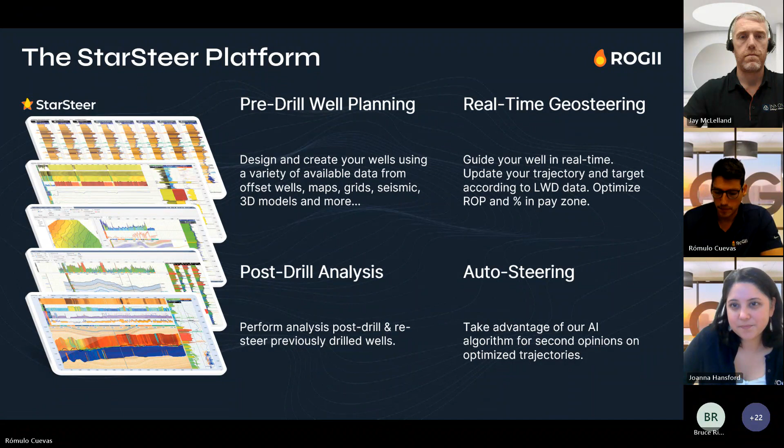Okay. So let's move on to Jay. Jay, would you want to talk about Innova?

Perfect, thank you. So Innova was founded in 2011, and we're a technology company that specializes in industry-leading software solutions which are tailored specifically to the energy sector. Our software focuses on 3 core areas. We have directional drilling, well planning, and drilling engineering. I'll talk a little bit more about them on the next slide.

We have a global market presence. I would say North America currently represents our primary market, where we're the software of choice for almost all of the directional service companies. Customers also include the operators and well engineering companies.

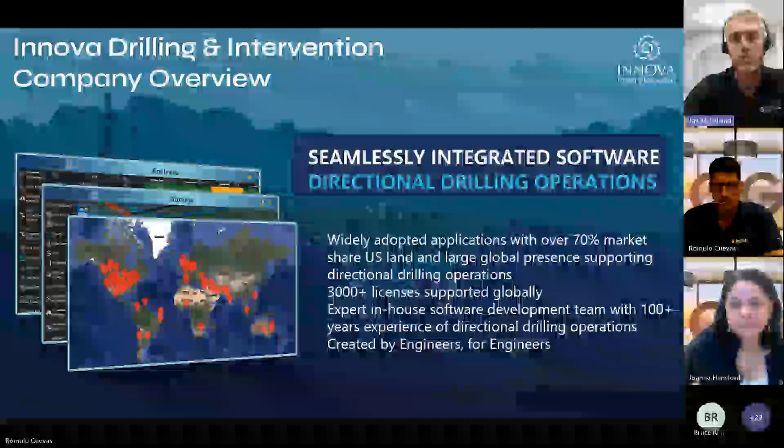I would say that probably one of the things that really sets Innova apart is our team. So most of us have direct experience working in the energy sector as well planners, directional drillers, MWD engineers, and drilling engineers. And this hands-on experience really gives us a deep understanding of our clients' challenges and enables us to develop software that truly meets their needs. If you could move on to the next slide, Romulo, please.

Thank you. So as I mentioned, the 3 core areas that we specialize in are directional drilling, well planning, and drilling engineering. And as such, users can utilize the software all the way from the initial design phase through the drilling phase and beyond to post-well analysis.

Now in the design phase, well planners and drilling engineers can plan the well trajectory, ensuring that they hit all the desired targets and avoid any offset wells by running anti-collision scans. They can then run torque and drag and hydraulics calculations to ensure the well can be drilled within the limitations of the rig and the available tools.

At the rig site, your directional driller can use the software to enter the surveys, ensure they're following the desired plan, while at the same time using our integrated daily reporting package to record all of the rig site operations. Now, all of which has been sent back to the client server database in real time, which gives full operational oversight to everybody involved in the project. And it allows for real-time optimization, utilizing things like our EDR data and engineering calculations.

At the end of the job, our analytics package then allows for a comparison of key performance indicators across multiple wells, giving invaluable insights across all the company operations. Now, this ensures that the lessons learned are identified and carried across to the next project. And all of this is achieved basically through a suite of desktop and web-based applications and accommodates single rig operations through to multiple global drilling operations and everything in between.

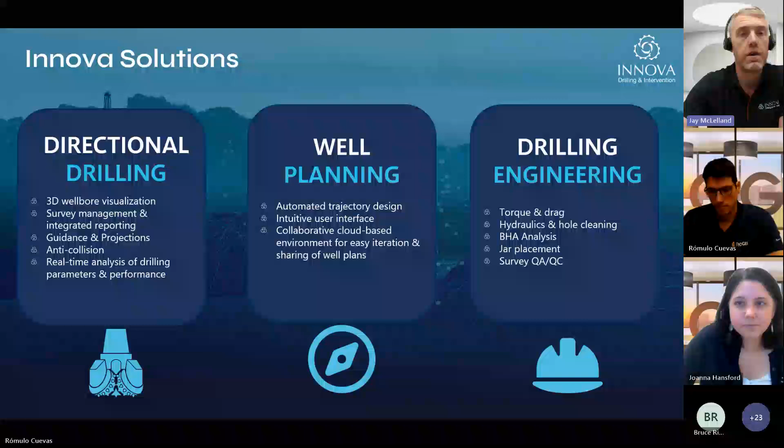Go to the last slide, please, Romulo. Thank you. So one of our primary goals is to offer solutions that enhance data flow and as much as possible, simplify complex manual processes. To achieve this and meet the industry's constantly evolving needs, we enhanced our software solutions with an API integration. So the API enables cross-platform communication and data transfer, and it provides our clients with a more streamlined and efficient workflow.

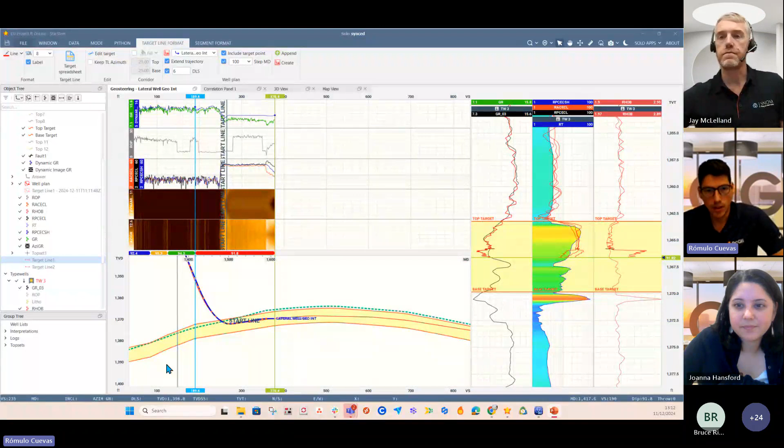Okay, so as a light demo, we have prepared a project. So this is the Geosteering interface. I believe the majority of you know it. So what we are going to do is send the projection of our target line from Geosteering to the other software, WellSeeker, where we will create a plan, and the plan generated in WellSeeker will pop up in Geosteering again.

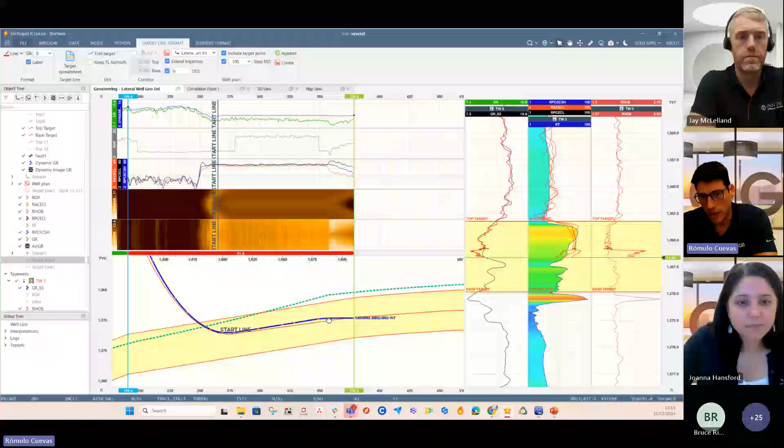So as you can see in this project, this blue line here is my actual horizontal well. This is inside of the reservoir, right? And I have a red line here, which is my well plan. Okay, so by now the drillers are following the well plan, and we have also image logs, density image log, resistivity logs, density logs, gamma ray logs.

So now I'm going to perform geosteering. So I go to mode, geosteering, and I can see, okay, I'm following with this stratigraphic technique. I'm following my stratigraphic position based on the correlation between my gamma ray, resistivity, and density logs.

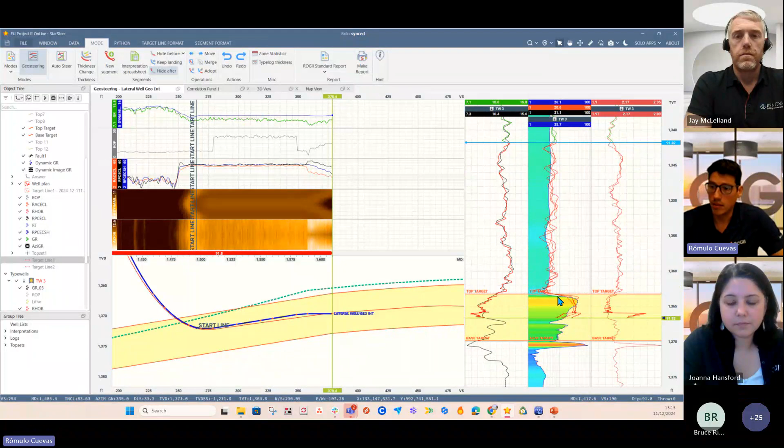And I can see in this area that the log is different. I have a low value in gamma ray. I have a high value in the density log, so I can split the log here and keep following this correlation. So I know, okay, perhaps we have crossed a fault here, matching my density peak here and my low gamma ray in this area.

And then I can visualize also my image log, and I can see that there is a sharp contrast here in my image log. So I'm going to bring this fault a little bit here to match with my image log too. So everything is matching here. My gamma ray and density are matching, and also my image log is suggesting this sharp contrast.

So now I know I am actually outside the reservoir, because we crossed a small fault around 4.4 throw, and I need to change the inclination. I need to change my projection, right? So I'm going to activate my target line, and I can place my target line inside of the reservoir based on this interpretation. And after that, we can start sending this information to WellSeeker.

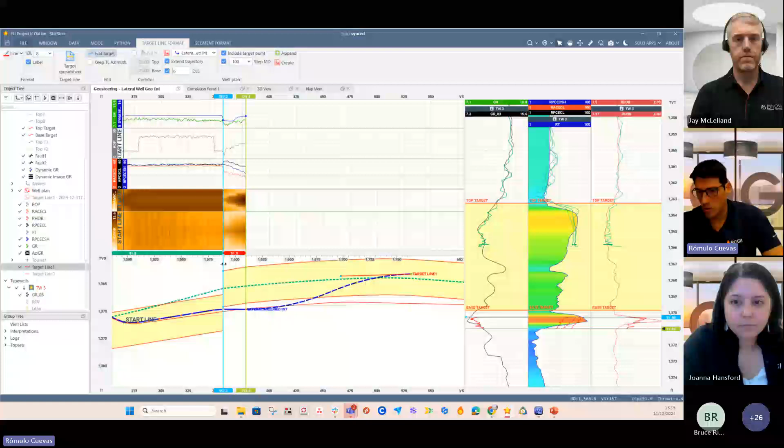So I'm going to open WellSeeker here, and my friend Jay will talk a little bit more about the interface here. Thanks, Romulo.

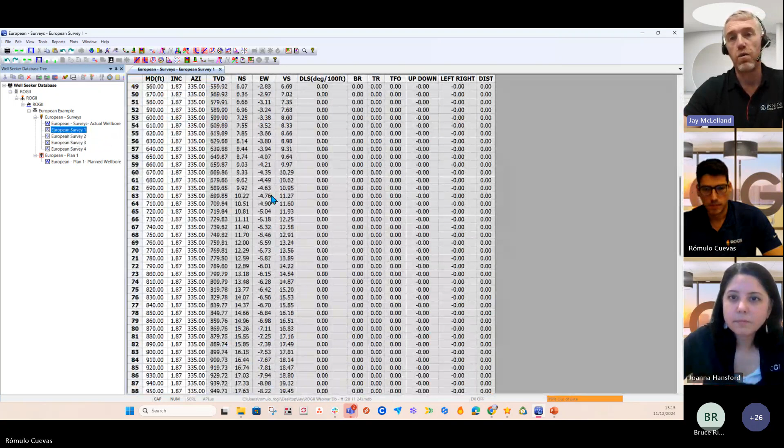So what we're seeing here is our desktop application, WellSeeker Pro, and this is what would be in the field. The directional drillers would be using this, and they'll have the principal well plan on here, and they'll be putting the surveys in as they go along. They will be doing the daily reporting and everything else within here. And there are tools that they will utilize as they're drilling along to help them stay as close to the target line as they possibly can.

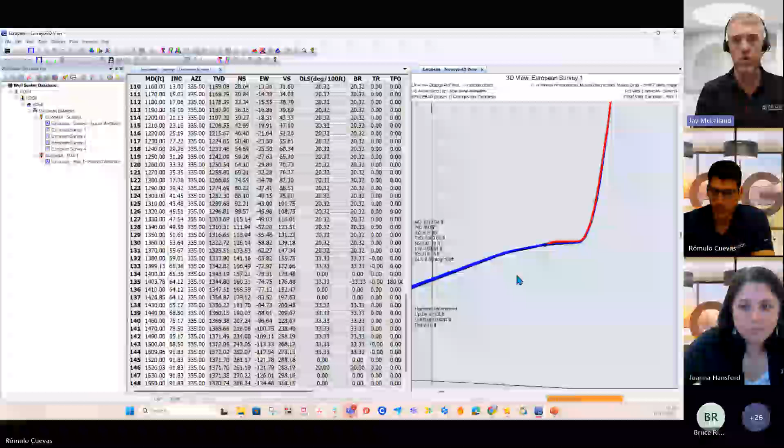Now, what Romulo is showing you here is a situation where the directional driller is drilling a well where we have a lateral. As they have landed out the curve and are now into the lateral, they are aware that there may be some level of geosteering depending on how things go and the data that comes back from your MWD tools.

Now, historically, you would have your geosteerer, your geologist, sitting with the StarSteer software, and the directional driller would be on the rig with WellSeeker, and there would be a new target line, which would then get emailed or sent digitally to the directional driller, who would then have to manually enter that into WellSeeker to create a new target line. And they would then have to send that back to the geologist so that they could put it into the system and make sure that we were all on the same page.

So what we've done now is we've simplified this process massively to cut down on the potential for human error and to cut down on the number of steps required, so that it speeds the whole process up. So now, when the directional driller gets into the lateral, all they would do is go to the tools menu, if you could, Romulo, and they would select the Solo Cloud target lines.

Now, in here, there are only two things that you really need to enter: a username and a password. The username and the password would be on the StarSteer side, so they would be provided with that information. And the way that the two systems communicate or understand the wells that you're looking at is based on the API number. So you have the API number in WellSeeker, you have the API number on the StarSteer side, and it will see that, understand, and give you the OK.

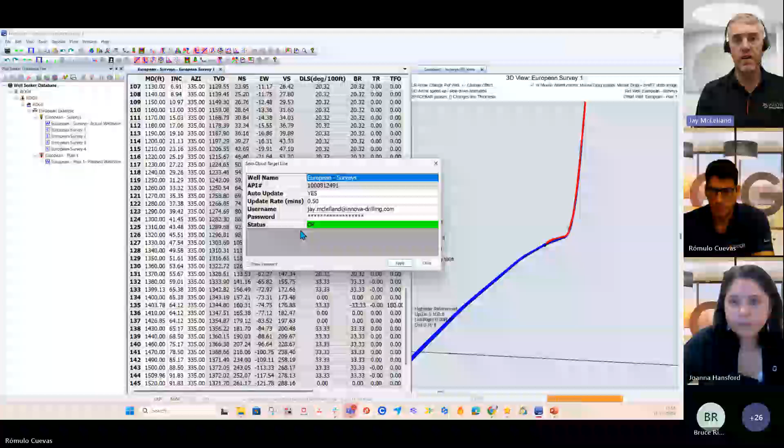And the system would then now be in a situation where every 30 seconds, we will check on the StarSteer side to see whether or not there is a starred target line. And that'll pop back over to Romulo to show you how that would look.

Yeah, so once we understand the structural tendency with the interpretation, and we have the projection now with the target line, I'm in the reservoir, I can just right click on my target line and set the star. The connection is already done in WellSeeker. So if I come back to WellSeeker here, I just need to wait a little bit, like 30 seconds. WellSeeker is reviewing which target line is starred in the project to send to create the new well plan, basically.

Yeah, so your directional driller at this point would be drilling along, following the line. They don't need to know anything, and literally it will just pop up as you've just seen on the computer. So this is the target line as it would normally be sent via an email. Yeah, so the target line with my projection in TVD, dips, everything. So what they need to do is just hit accept here, and the software automatically will create a new well plan, as you can see here in the 3D view.

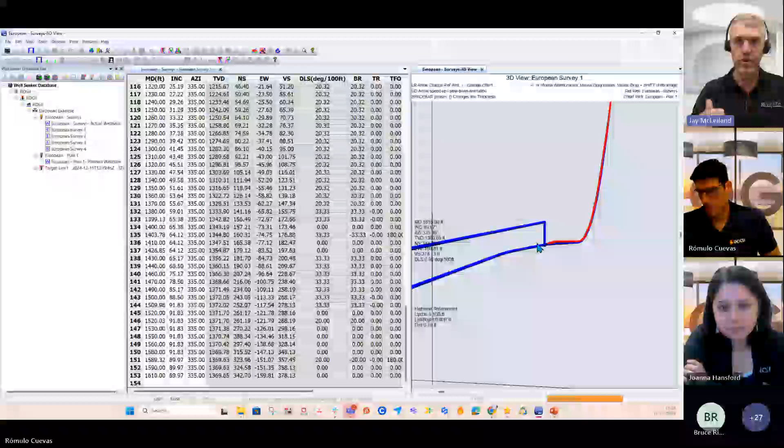Now, something to point out is you can see that it's a very sharp line from the original plan. It's designed like that. It's not designed to be a well planner's plan that would maybe use a 2-degree dogleg to build and hold and then drop. This is literally something that the directional driller now aims for. And the directional driller has the toolkit that they need within the software with our project ahead functionality, so they can project ahead and get back on that target line within the parameters that work for them in terms of what their tools are capable of and what they've been seeing.

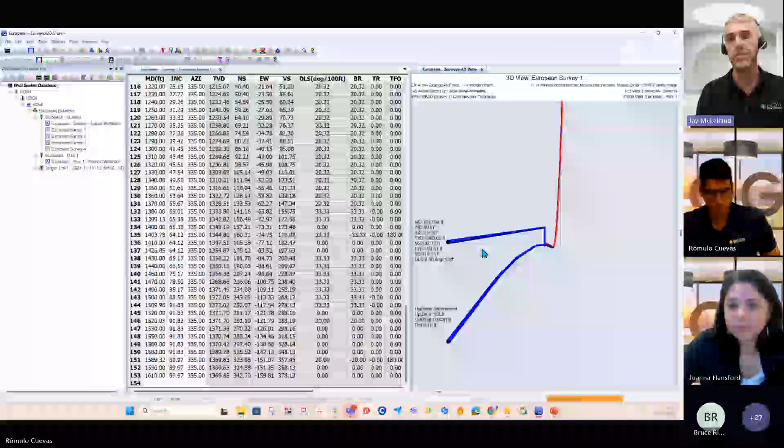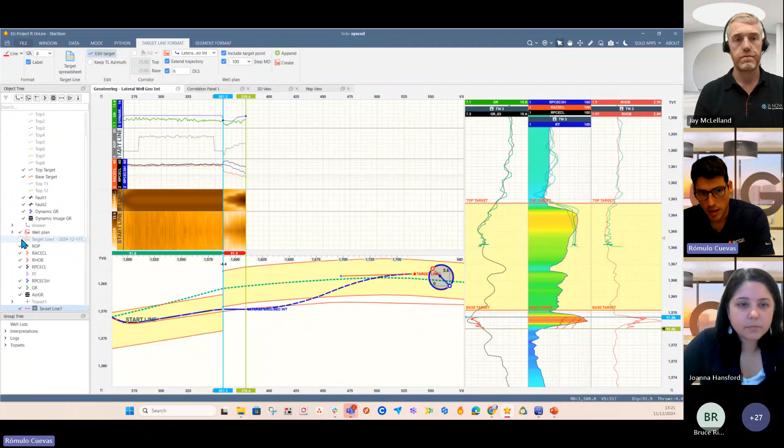So then once this has been done, as soon as that target line has been created, it now gets automatically pushed back to the StarSteer system. So basically it forms a closed loop system where it's a click of a button on the StarSteer side, click of a button on the WellSeeker side, and everybody's now kept up to date. Exactly. So in StarSteer here inside the well, I get automatically the new well plan. As you can see, this is my new well plan.

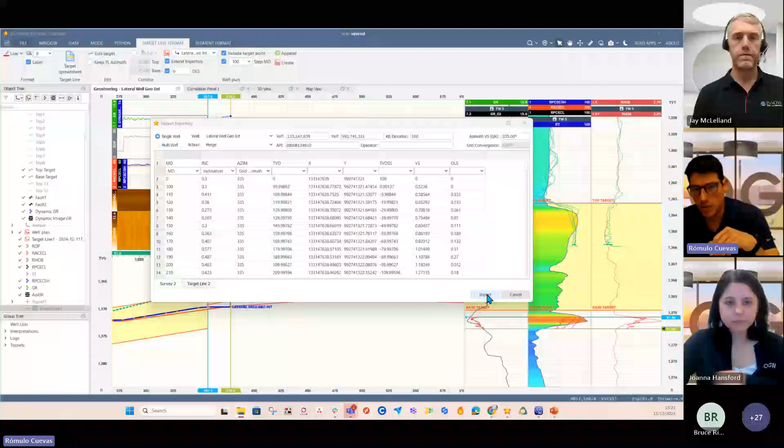So the drillers need to aim now to build inclination and aim these TVDs I'm projecting here. So I'm just going to send into StarSteer. I'm gonna bring more survey data. Okay, so imagine the directional drillers are drilling to aim this position here. I'm gonna send more log data, and more image log data. Here. Okay, so once I get more data, right?

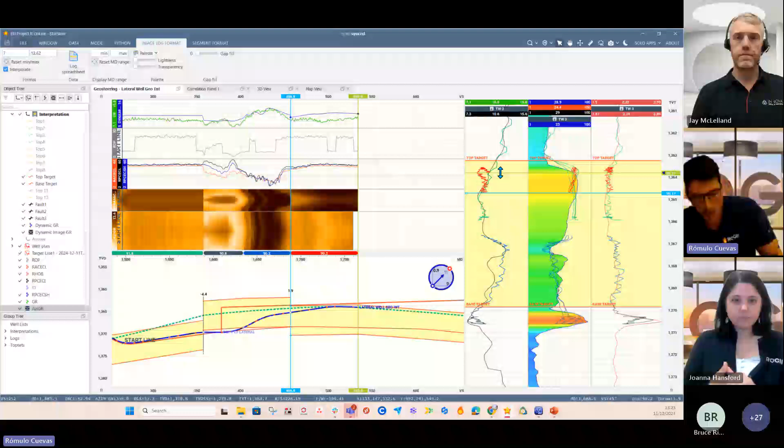So what we need to keep doing as geologists, as geosteerers, is keep making the interpretation. So I know, okay, I am coming back into my reservoir. The drillers actually build inclination, finding the TVD position I projected before, following this new well plan, right? And I can see I cross twice this high density peak. So I'm gonna keep following my stratigraphic correlation here. I can see that now I'm in this area of the reservoir, and at the end, actually, I am a little bit higher in the reservoir, as you can see, in this area.

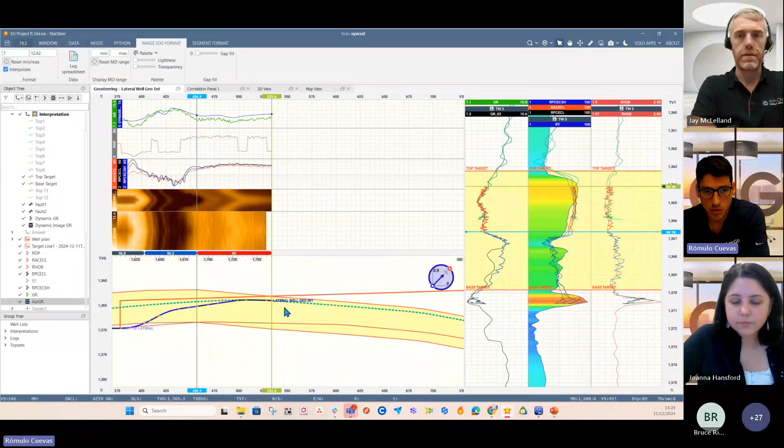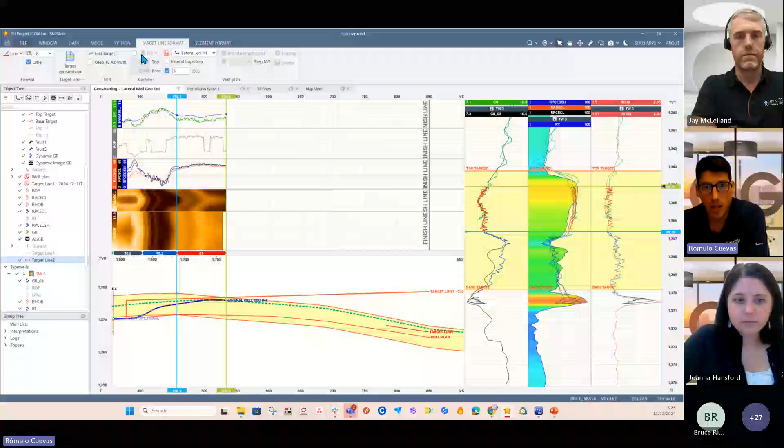So in my interpretation, based on my correlation, I can see the structural tendency is dipping down 1 degree. So it's not 90 anymore, it's not flat anymore. So we need to actually change the projection again. Otherwise, if we follow this plan we just created, we will exit the reservoir from the top again. So what I'm going to do now is reset the start here and activate another target line. In this case, this target line will help me to drop inclination. I'm going to start it. So now my projection is to drop inclination to hit this area where I believe I'll be, based on my interpretation. Okay, so I'm going back to WellSeeker now.

And I'm just going to clean this survey 1, the 3D view. I'm going to open the survey 2. So this is the current survey we have until the current MD. Yeah, so from that target change, we're now fast forwarding a couple of hundred feet. The directional driller has been following the new target line that they've had, and at this point now, we're going to get this new geosteering update.

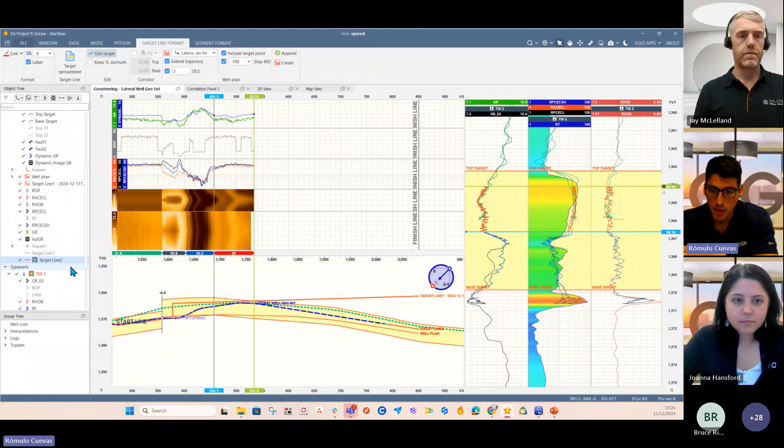Exactly. So now if I come back to StarSteer, what I need to do is again right click in my new target line based on my interpretation, and then set the start. And now I just wait here in Well Seeker, right? Every 30 seconds, Well Seeker is scanning for new target lines to keep updating this planned trajectory based on the interpretation of the geologist.

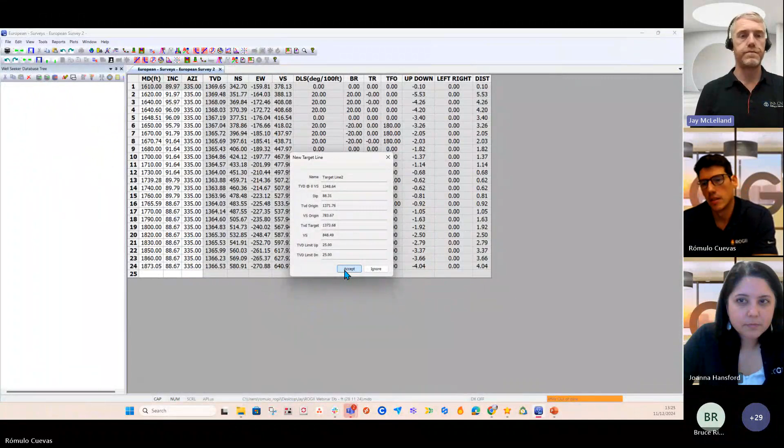Well placement. Yeah, and you can set up the time that it checks to a different frequency. 30 seconds is good, because then you don't miss anything, but if you wanted to make it longer, you could. So now I received my new target line 2, with the TVD and inclinations I project there. So I'm going to click here, accept. So now I have my target line number 2.

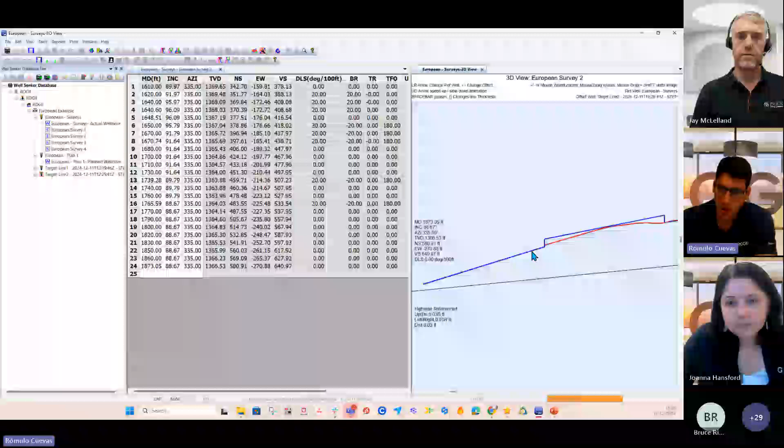So let me open here the 3D view. Bring here. So now I can see that I have my new well planned trajectory that is now going down, following my interpretation that the formation is dipping down, right? Yep. So then the directional driller from this point onwards has got the new target line that they're going to follow, and they will adjust their steering requirements based on that.

And then this is now eat, sleep, repeat. They'll continue to drill the lateral, and there could be 1, 10, 100 geosteering changes. It doesn't matter. Anytime a new one comes up, it will pop up on the screen. They hit accept, it creates a new line for them, pushes it back to geology, and move on until we TD the well. Yeah, exactly. Basically that's the loop.

So again, here, if I open StarSteer here, I can see my new well-planned trajectory, so the drillers can aim in this area, and we will still be geosteering, making the correlation using different geosteering techniques to understand the structural tendency of the reservoir in real time, and the transition, this projection is quite fast and easier.

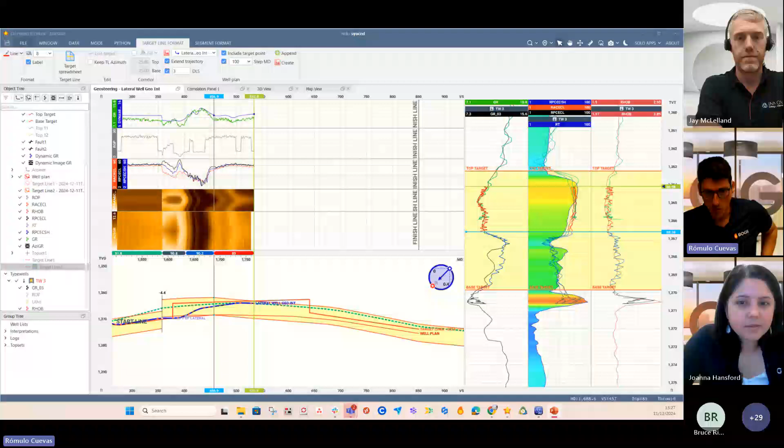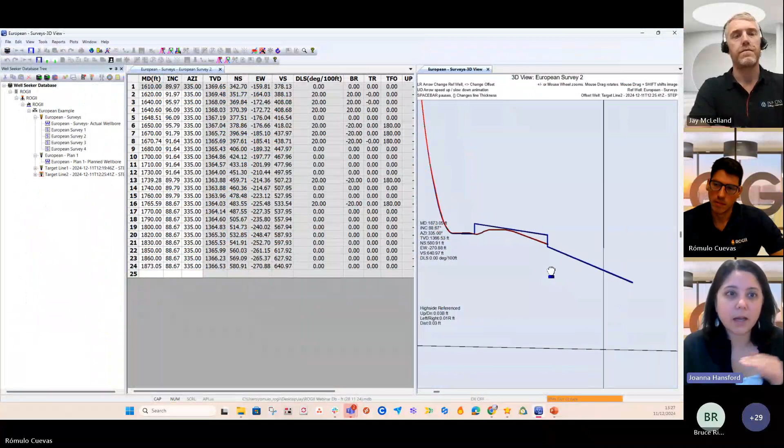Okay, so. Oh, just while we have the StarSteer screen open and Well Seeker Pro open, I just wanted to ask a question. We haven't had any questions yet in the chat, but I was wondering, when we're working with real-time operations, we often have quite a number of people involved in the drilling of a well. Not just the operations geologist doing the geosteering and the directional driller, but various other people who really want to follow along as we're drilling. So how can we set this up for these people? Is there a way for them also to collaborate in this process? I'll ask Jay first, and then maybe Romulo, you can also answer from the StarSteer side.

Yeah, great question, Joanna. So from the Innova side, if our client, the service provider, is utilizing a server database infrastructure, then we have a server database located in a cloud-based environment, and when the guys are working in the field, they will work on a local database. Within our system, we have data synchronization between the server and the local database. So anything that happens on the local machine, when the directional driller hits save, it automatically syncs up to the cloud. So anybody that has access to that cloud can see it through Well Seeker remotely, through our web portal or our mobile app.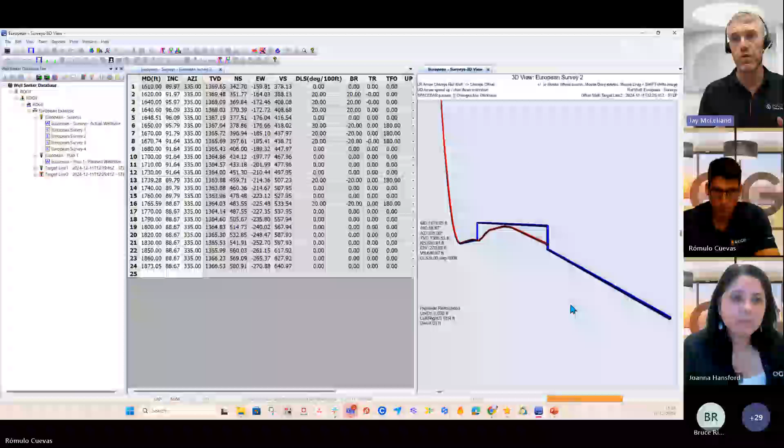If they've got access anywhere in the world with the right login credentials, they will be able to see what's happening. Now, when a new plan is created on the local machine, and it's a principal plan in the way that we do within the workflow of this integration, then that new plan is automatically pushed up to the server database, which gives everybody on the Well Seeker side full visualization of that.

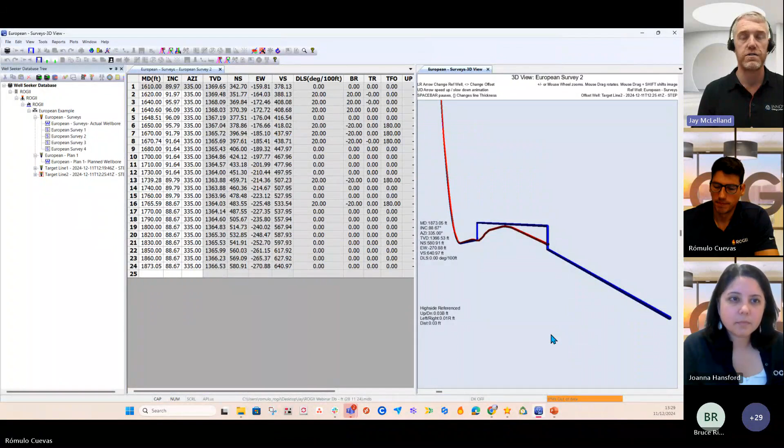So yeah, basically everybody's kept up to date of everything that's happening on the rig site. That's good to hear. Yeah, well, same happened here.

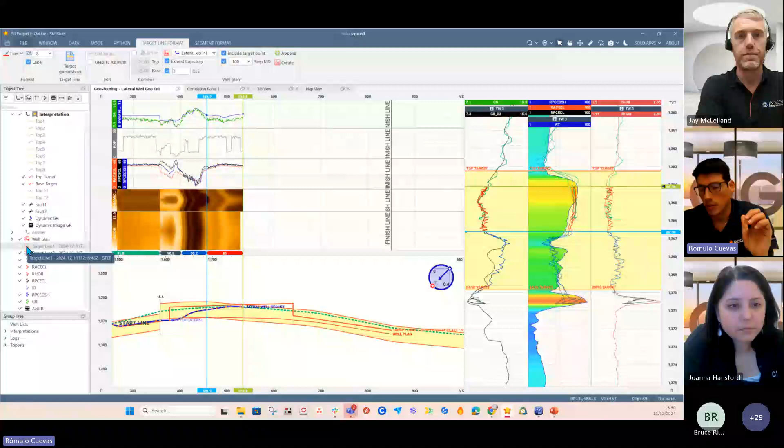Because we are working in the collaborative space of the cloud, in the Solo cloud, all the plans that arrive inside of this project will populate my global projects. If I'm working on this small virtual project with just one offset well, with my real-time horizontal well, all this data will be updated in my global project. So everybody who has access to this global project or the virtual project can see the new well plan available. The good thing is you can also see the time and date of the well plan, so everybody knows exactly which is the latest one, and there's no room for mistakes like when sending emails with plans and trajectories.

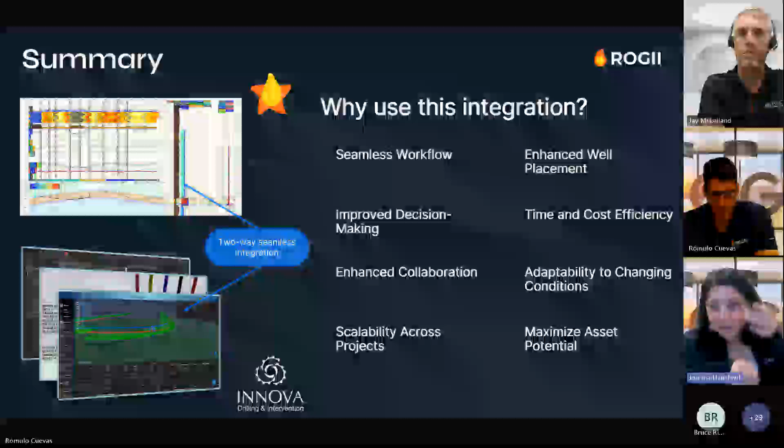Oh, thanks for answering my question. All right, well, I don't see any more questions from the chat here online, but hopefully if people do have questions later on, they can also send us a message, and we'd be happy to answer those.

But just to review, this demo, which was actually really nice, very simple and easy process. What the benefits are of this integration - Jay and Romulo will chime in here and make your opinions known too. But essentially, we're showing a seamless workflow.

We can cut down on the human error process where, when you're drilling, you need to send new trajectories between your teams. The way we can do this actually allows us to make decisions faster in real time. We're improving collaboration between our directional drillers and our operations team. And this is a solution.

It's really nice, and it can be scaled across all projects. So if you're working with StarSteer in your operations team and your directional drillers are using Well Seeker Pro, there's nothing to stop you using this on all of your lateral wells globally, taking full advantage of this. We're looking at enhanced well placement, improving time and cost efficiency, because we're able to remain in the reservoir target zone for longer, making decisions quickly. We also have quick turnarounds when adapting to changing conditions and drilling complicated wells. And of course, this enables us to maximize asset potential.

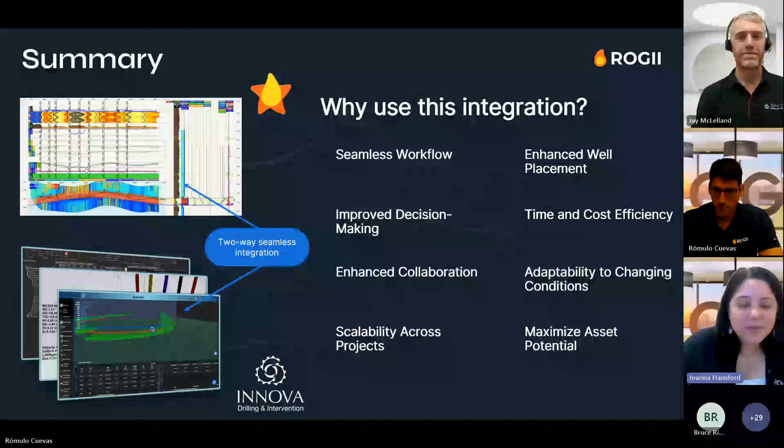Okay, so is there not any question from the audience? I don't see any. Not yet. Okay, oh yes, no, we do have one actually. So we have one that says, I think connecting to the external server with data is now prohibited by most companies - is there a way to keep it inside an internal server? I'm guessing that to a certain degree probably is from our side here.

So the external servers that we've got are cloud-based servers. We do have companies that maintain their own internal servers. Over time, we've found that most of them have migrated to the ones that we host. Almost all the companies - there's been no issue with any of the companies we've worked with to this point with regards to accessing data from an external server. Obviously, you've got to go through certain processes - you want to be SOC 2 accredited. Once all these things are in place and you've gone through all that with the IT and cybersecurity side of things, then permissions can be put in place to do this. So I've not found it to be a prohibitive issue so far.

Yes, I agree as well. From the ROGII side, we're actually able to work with companies on their internal server systems too. We don't advise it because you need to constantly update this - it's quite a complicated process, but it is possible. The solution is there. In terms of IT security, we're very hot on this subject, so we can talk to your IT teams and walk them through our cloud security too.